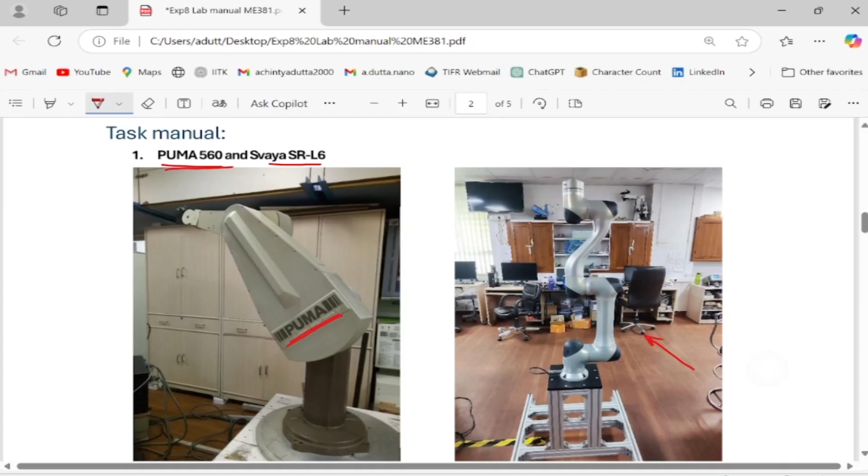Now, this is the structure of the Puma robot, which I had explained in class. So the axis system is also given there. It has 6 axes. This is the first axis. That is my Z0. That's my Z0 and Z1. This is the second axis. Okay. There's the third axis. This is the fourth axis. There's the fifth axis, and this is again the sixth axis. So Z1, Z2, Z3. This is Z4, this is Z5, and that is Z6.

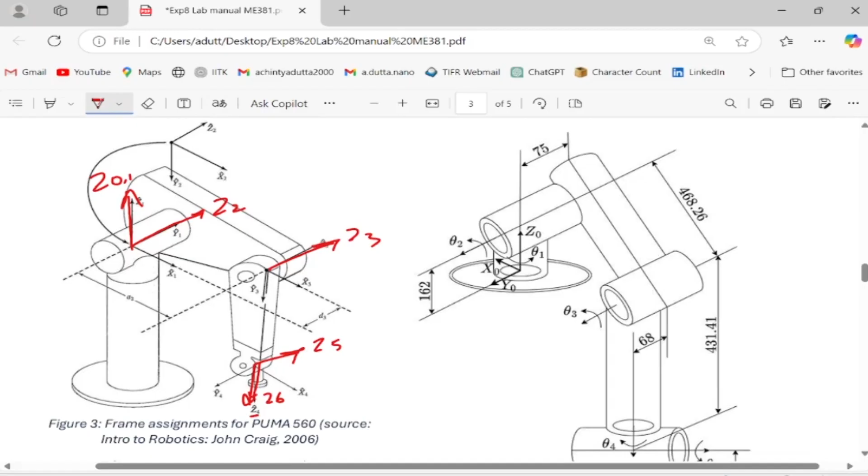Now, correspondingly, you can put the x-axis and write the DH parameter table. Okay, so you can take this as a homework and do the DH and write down the axes for this robot. And after you have made the axes for this robot, what you can do is you can fill in the DH parameter table, which is shown here.

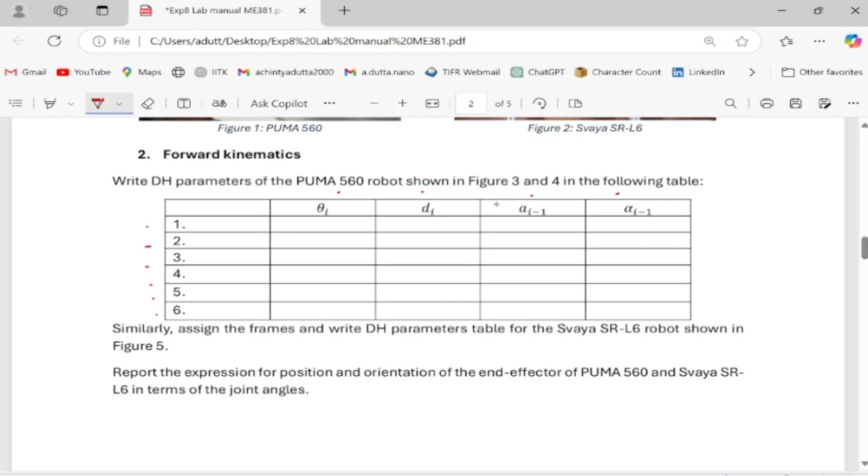So this is my DH parameter table for the Puma robot. So it is A, alpha, D, and theta, and there are 6 degrees of freedom. It has 6 joints which are given here. So this is a good exercise for you to understand how the forward kinematics of this robot is done. So this is the Puma robot. It has been taught in class also.

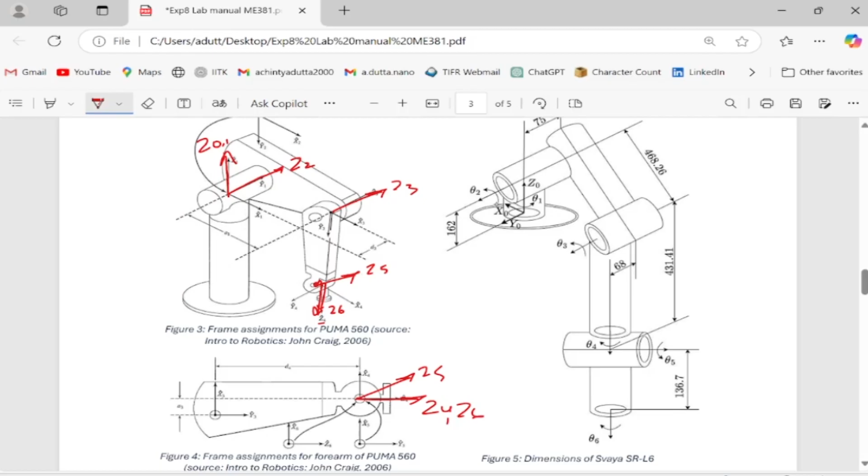Now, something to note here is that the last 3 axes intersect at the point here. So we have our z-axis here. So this is my Z4, that's my Z5, and that's my Z6. Z4, Z5, and Z6, they all intersect at that point. Now, if you look at the Svaya robot, this is the Svaya robot, the one on the right here.

Now, the structure is a little different in the sense that the first axis is here. The second axis is there. So that's my Z0, this is my Z1, this is my Z2, this is my Z3. Then that's my Z4. This is the fourth axis, the roll, which we call Z4. That's my Z5, and this is Z6 again. So structurally it is a little different.

For example, the roll in the Puma robot is at the wrist, whereas the roll in the Svaya robot is at the elbow. In terms of definitions, we say this is my waist, that's my shoulder, that's elbow, and roll, pitch, and yaw are there. So in this case, this is my base, which is my waist, this is my shoulder, this is my elbow. The roll is again at the elbow, and this is a pitch and a yaw there.

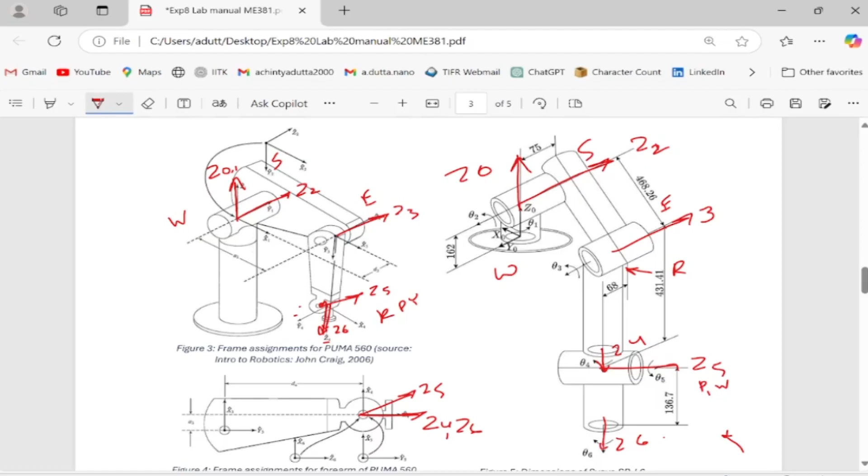So the structure is a little different, so the kinematics is a little different. It's a little tricky to do kinematics here. In fact, the last three axes are not intersecting, so you may need to do numerical computation there. So you can also write down the DH parameter table for this robot, which is a little bit more tricky, and then try and do the forward kinematics. So we'll be looking at these two robots today.

This is the Svaya collaborative robot, which means that it has safety features to interact with humans and collaborate with humans. As we go along, we'll see what are the various features of this robot. First we see that this has 6 degrees of freedom, and it can be programmed either by using the teach pendant, which is down there, or this basic PC-based mode, the computer, where also we can program it in different modes.

So first, this is the mode where we can jog the different joints. You can see that the various joints are drawn there: 1, 2, 3, 4, 5, 6 joints, and by moving the cursor you can move the corresponding joint manually. When you move, you can see on the left hand side of the screen the robot is also going to move. So there is a robot simulation here which moves.

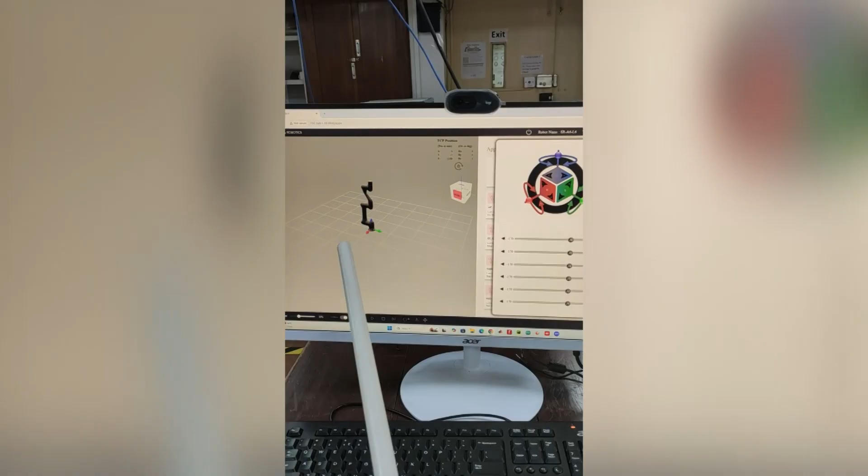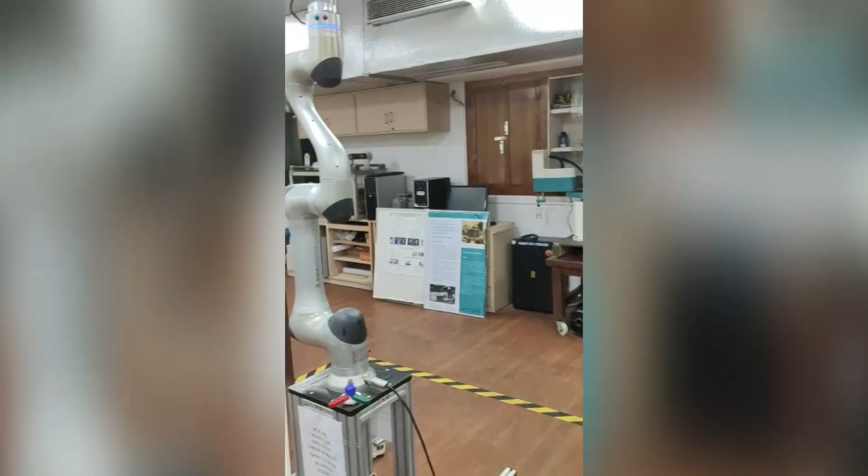This is the teach pendant, with which we can manually change the various joints, and this is the real robot here. So when we move on the computer screen, the simulation will move and the actual robot is going to move. So these are the 6 joints in the robot. The first joint is the base joint, which is a vertical joint. So let's move the first joint. You can see that the first joint is moving about the vertical axis, the first axis of the robot.

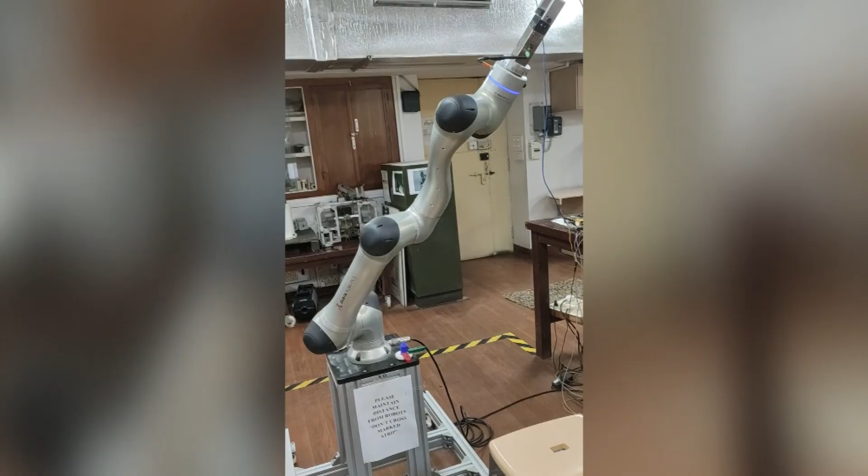Now, this is the second joint, so the arm is going to go up and down. You can see that the arm is moving, or maybe I'll see it from the side. So the arm is moving about the axis here. Oh, this is a large robot, so it goes out of frame. So this is the axis which is coming outside from there. Now it is going up again. So this is the second joint.

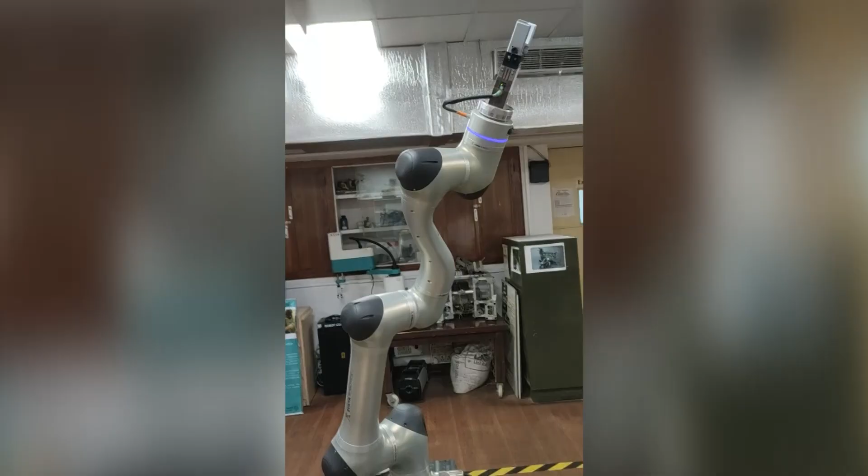So the first joint was this one, vertical. The second joint is horizontal, which is called the shoulder. The third joint is the elbow joint, which is this one. So maybe we can move the third joint, which is the elbow joint.

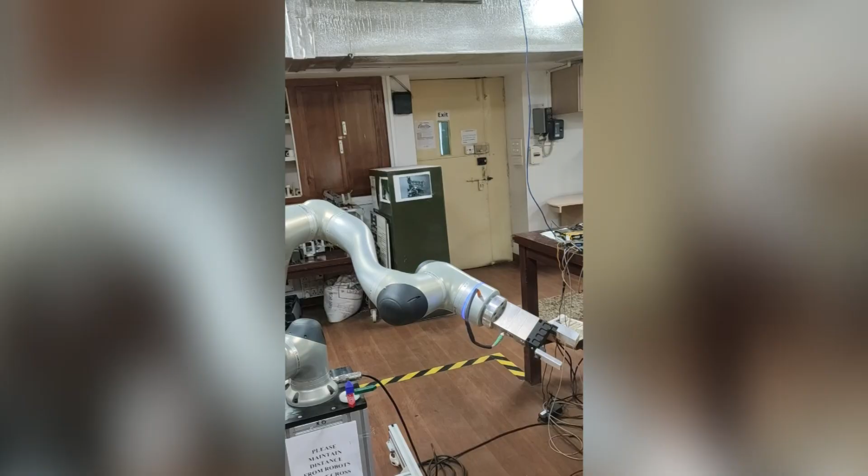And the elbow is going up now. That is the elbow joint which is moving up. Now you can see that as it is being moved, on the computer screen the simulation is also moving. So maybe I'll bring it closer. So the simulation is also moving. So between the real world and the simulated world there is a complete 1:1 correspondence, and as it is moving, the joint is moving in the simulation and also in the real robot. So this was joint number 3, that is the elbow joint.

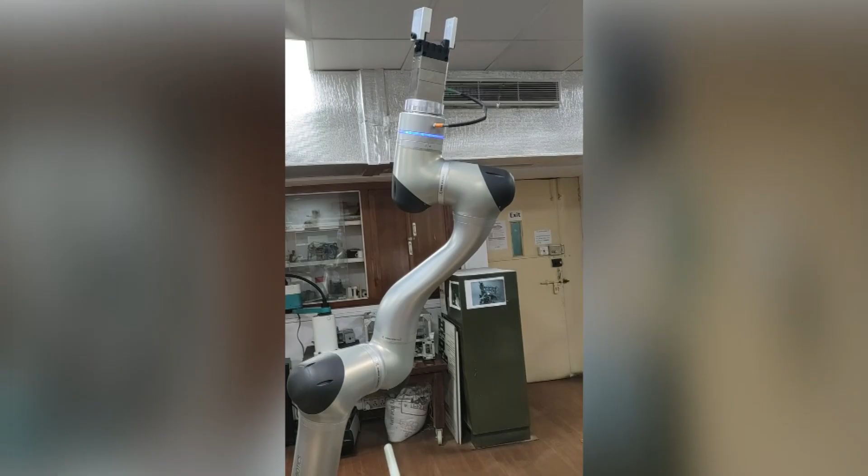Now this is joint number 4, which is called the roll axis. So the joint is a vertical axis, and this is the vertical axis about which it is rotating, in this particular configuration. So on the side, if we see, the joint is here. That's the vertical axis of the joint. So this is the roll axis.

In the case of the Puma robot or the human arm, the roll axis comes at the wrist. In the case of the human arm, it is at the elbow, but in the Puma robot, which we'll see, that comes in the wrist of the robot. Whereas in this robot, it is coming at the elbow, which is very similar to the human arm. So again, joint number 1, joint number 2, joint number 3. This is joint number 4.

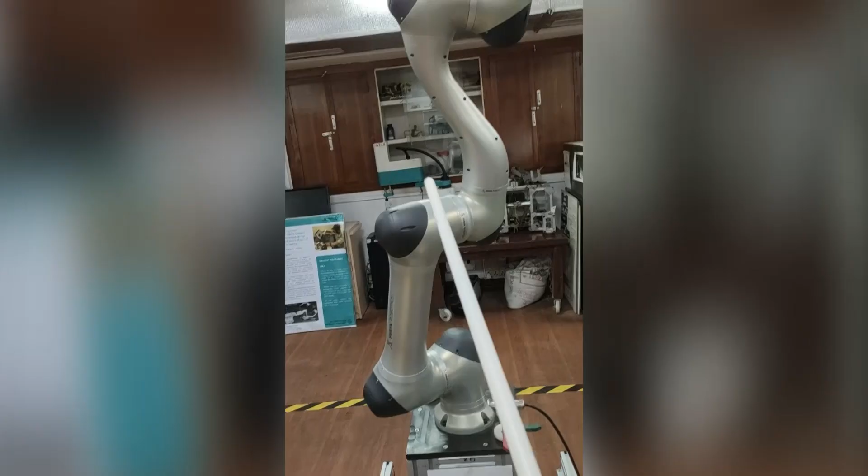Now joint number 5 is this one. That is joint number 5, which is a horizontal joint. So when it is moving, you can see that not the arm, the wrist is coming down. Okay, the wrist is coming down. So this is my axis, the 5th axis. So this is the 5th axis which is moving. That is this one.

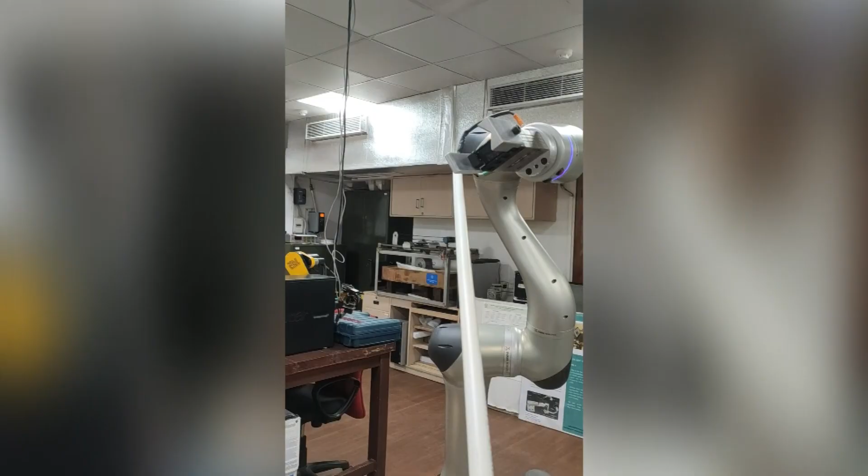Now, the sixth axis is the roll, which is this one. This is my axis, which is vertically out, coming out from the gripper. So it's vertical. This is my vertical axis, which is rotating now. Maybe you can see it closer. So that is a rotation about the vertical axis. Sorry, not the vertical axis, the sixth axis, I mean. Yeah, this axis is the sixth axis. So that is the sixth axis.

Okay, so that gives us the six axes: axis number 1, axis number 2, axis number 3, axis number 4, axis number 5, and axis number 6, which is here at the back. Now you can see that the structure of the robot is a little different from that of the Puma robot, in the sense that it has a very curvilinear structure. So it is curved and the roll axis is coming here. So if you look at the joints, they are curved.

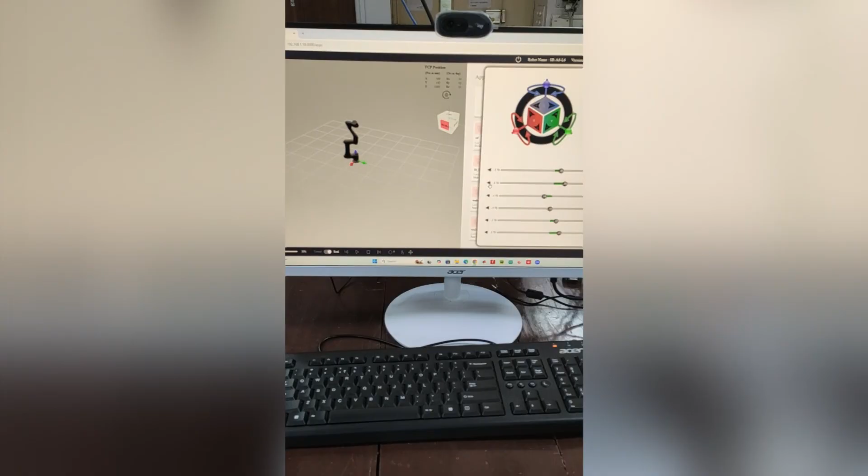So we have seen the basics of how to move the various joints using the teach pendant, and the simulation of the robot correspondingly has a 1:1 match with the actual robot. So we have 6 axes plus the gripper, so we can turn the gripper on and off. So this is the end effector, in this case a gripper. This is not pneumatic. This is an electrical gripper, and the gripper can go on and off.

So the gripper is in open condition now, and now it is in closed condition. It doesn't close more than that. It's not required. So that's the open and close motion of the gripper. So we explained the 6 degrees of freedom of the robot and the open and close of the gripper.

Now let us look at writing a very simple program. For example, if I want to move the robot to some position. The robot has come back to its original home position now. Now suppose I want to write a very simple program to move the robot to some point in space. Say for example, to this point in space I want to bring the robot. So manually, we can bring the robot to this point, and from here maybe I want the robot to go here.

So I'm going to store these 2 points in the robot space, and then the robot will move between these 2 points. So to do that, we write a program. As it is shown, it is a very, very easy way of writing. This is basically a GUI given by the robot manufacturer.

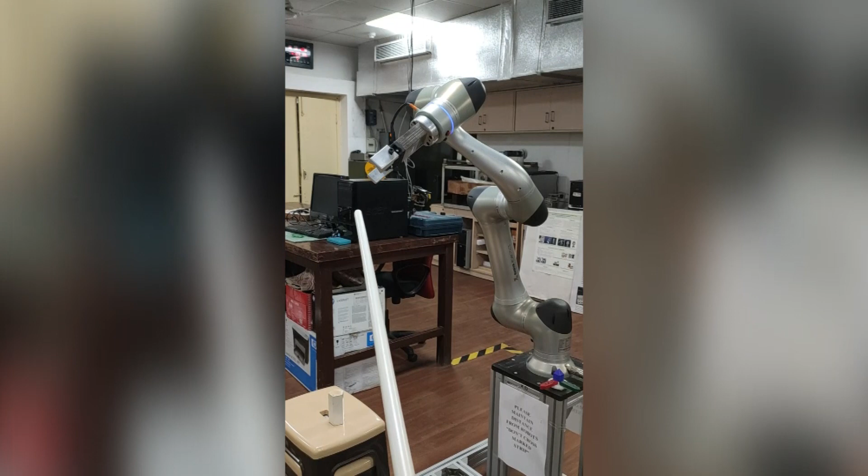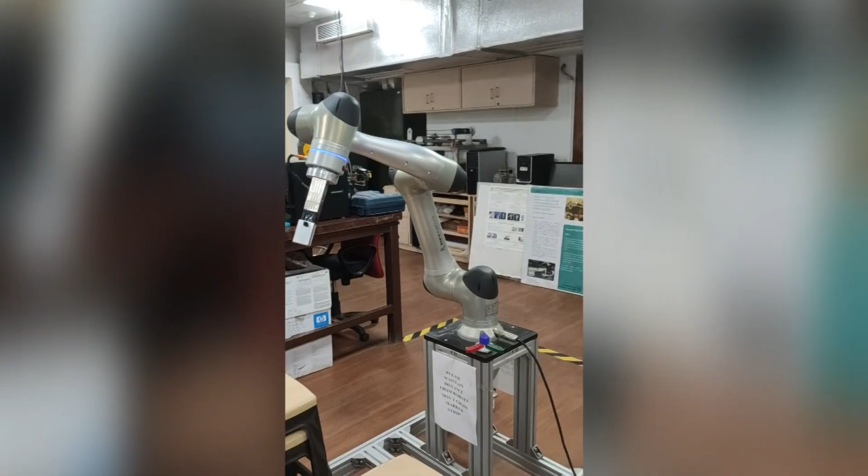okay, maybe this point is 1 point. So what we have seen is we are teaching it manually to come to this point. So this is the point where we have just brought it manually now. This is completely manually being brought here. So this is 1 point, and I say that in the program, this is point number 1, where it has been taught. Okay, that's the point number 1.

Next, what we can do is we can choose the move command. So we are going to move it to another position. For the second position, again we use the manual mode by changing the various joints. I'm moving the robot, so the robot is moving to some other point now. This is completely manual.

And now what we can do is we can play this program. It is going to play the program between these 2 points. So we move the robot between these 2 points. So these are the 2 points which we taught manually, very simply by choosing these 2 points and then writing the program.

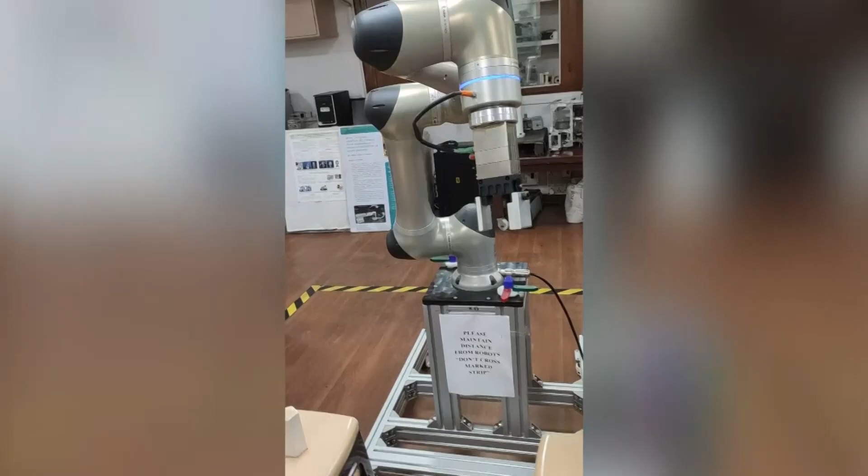Now this is a GUI, so it's very easy. You just pick up the position commands, put them in there, and manually teach it. Unlike in VAL language, where we have to actually write the program ourselves and teach the points, here it is much easier. So we taught it the 2 points, and the robot is moving in between the 2 points now. This is the simplest way of teaching a program, by manually teaching the points and then moving from one point to another and repeating it. This is probably the simplest way you can get in robot programming.

Now what we can do is add other features. For example, we want the robot to go and wait at some point. So we have added a wait function there. You can see the wait for time 1 second. 1 second is very quick, so maybe 10 seconds, or maybe 5 seconds. So we have added one more block which says wait at position number 2 for 5 seconds. So now when we run the program, it moves from point 1 to point 2 and waits there.

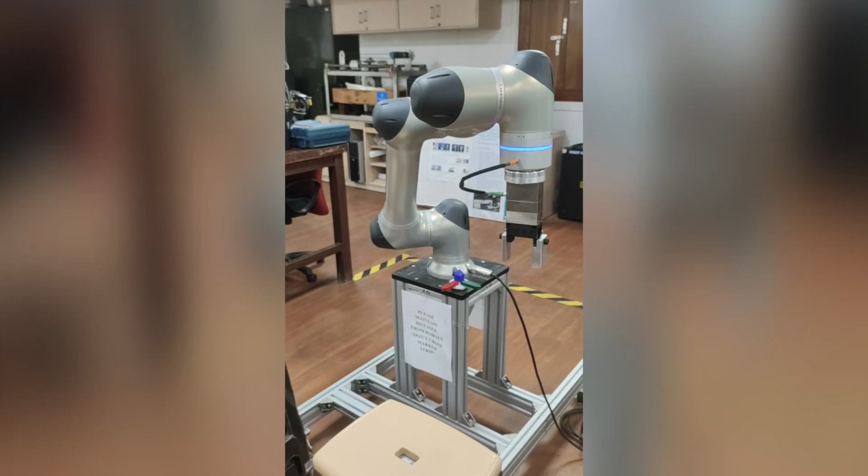So it's waiting at each of the points for 5 seconds. This is similar to the delay that we put in the VAL program. So this is the simplest way of writing a program, where you can choose various blocks and arrange them in a serial way, the way you want the robot to move, and the robot will execute the same motion.

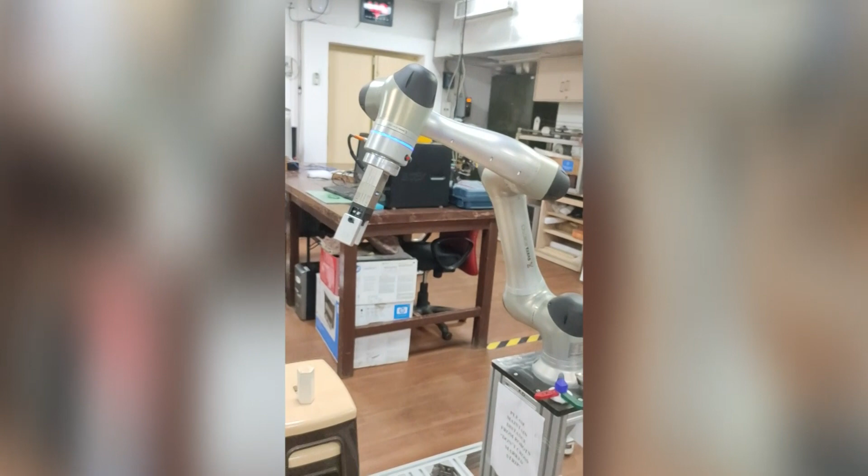Next, suppose we want to pick up an object. You can see there are 2 stools in front. There is one table or stool kept here, and another one kept on this side, and there is an object kept on it, a rectangular block. Well, it's not rectangular, it has 5 sides, so it's a pentagonal block which has been kept there.

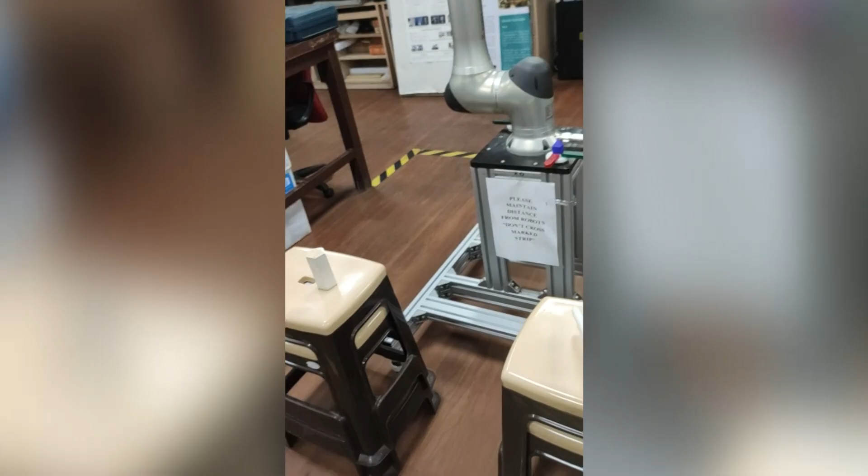So from the start point of the robot, we can manually take the robot to this point and teach it the position and orientation of this part which is kept there, then close the gripper, pick it up, and maybe go and put it here. Again, we teach it the position and orientation of the point where we are supposed to keep it, and then we can keep it at that point.

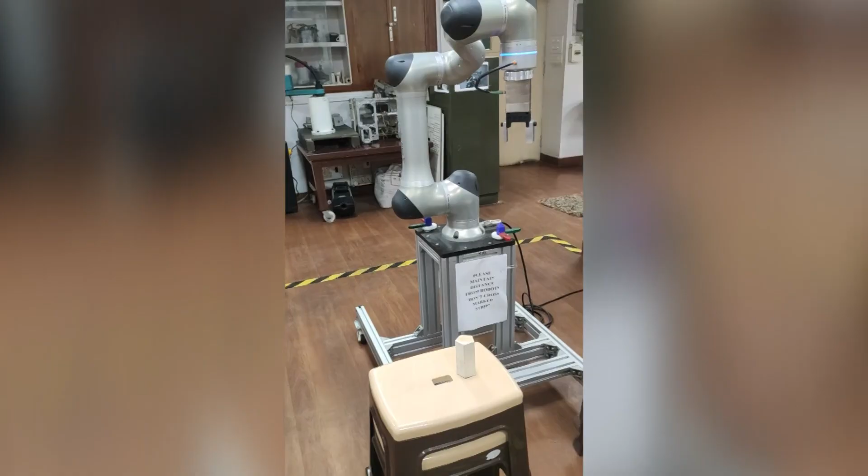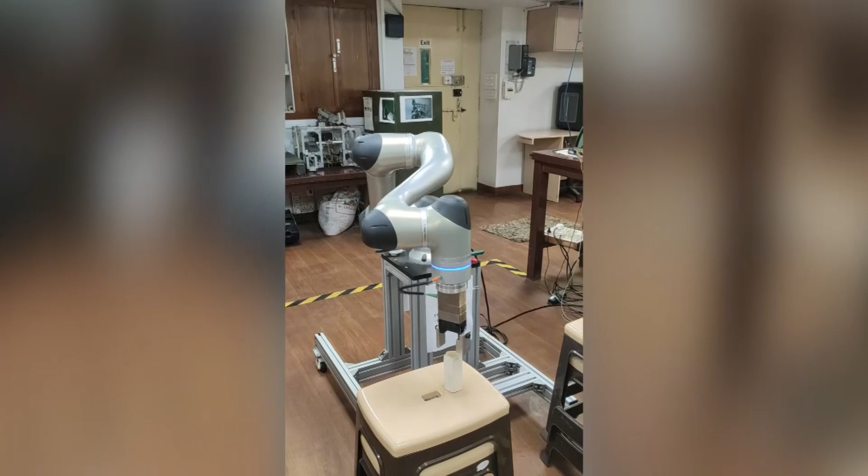Okay, so what you found is that it picked up the part. So the program has been written simply by teaching it the various points. Now let's play the program again and have a look. Okay, so maybe you can play back the program again, put the part in here. Okay, so this is a very simple way of programming a robot.

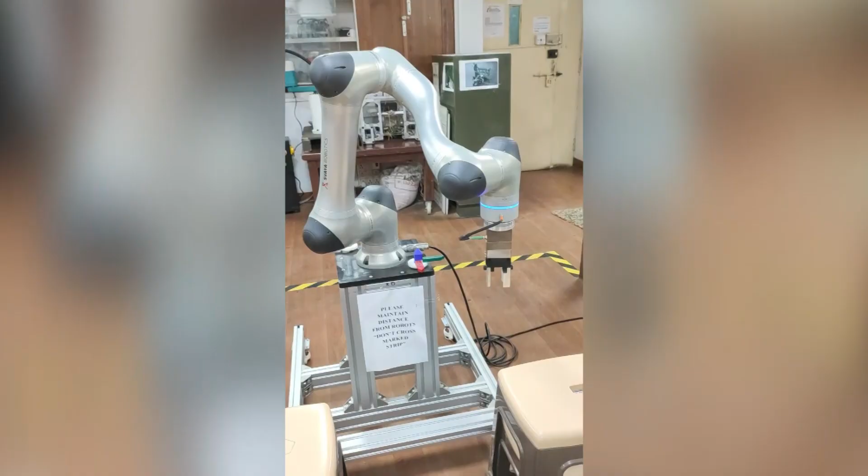Okay. Okay, you can run some of the program. This is another program which has been written earlier to move from some position to some other position. So you can see it in different directions.

This is showing the covering of the whole work volume, or the full work volume of the robot. So it has a pretty large work volume, almost 1.5 meters.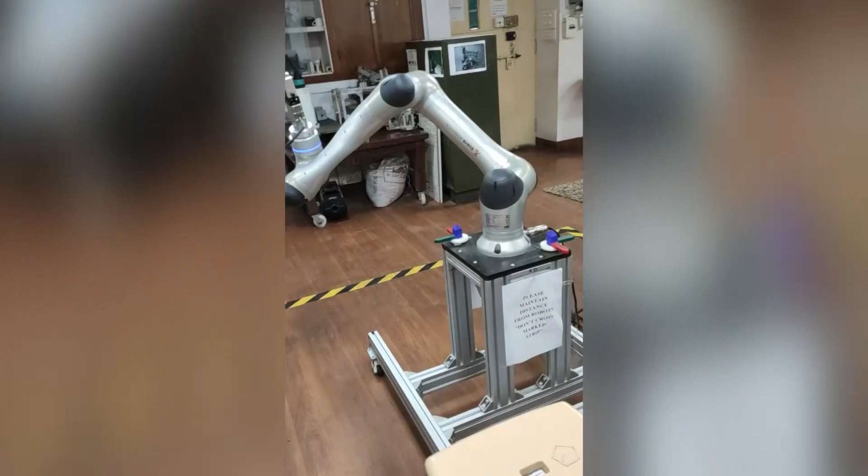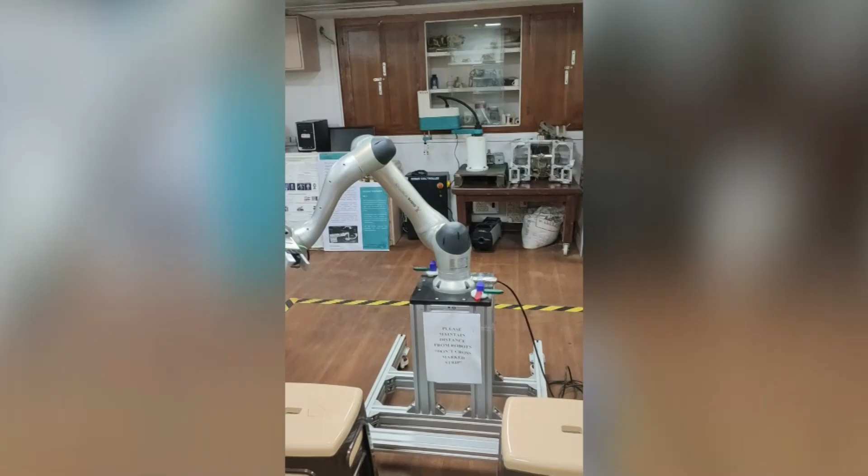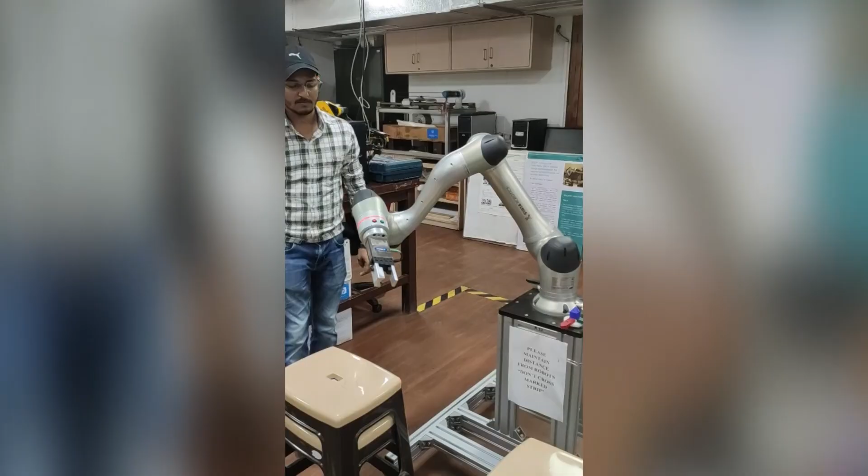Okay. Safety mode is on. So that is something to show about the safety mode, that if it goes and hits something, it immediately stops. Okay. So that is one of the reasons why it's called a collaborative robot, in the sense that it can collaborate with a human. So in terms of safety, it can sense the force being applied.

How does it sense the force being applied? It basically measures the motor currents. So if it hits something, immediately the motor current goes up, and it understands that an extra force has been applied, and based on that, it will immediately stop. Okay. So the next part that we have is, this is a collaborative robot. So we are able to program it even by catching and moving it.

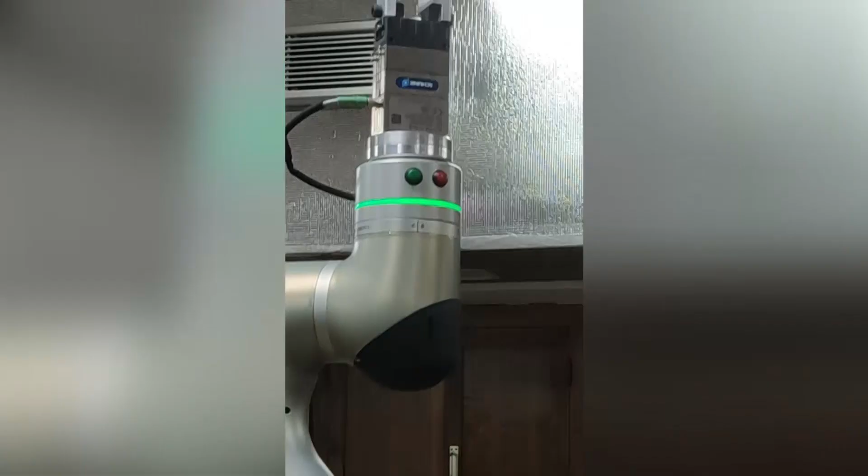So you can actually catch the... So there is a mode. So we just change the mode of the robot. And by changing the mode of the robot, basically, we can see that these are different modes of the robot. So we're going to change the mode of the robot, and then we can simply move it by hand. So you can see that he is just simply catching the robot and moving it.

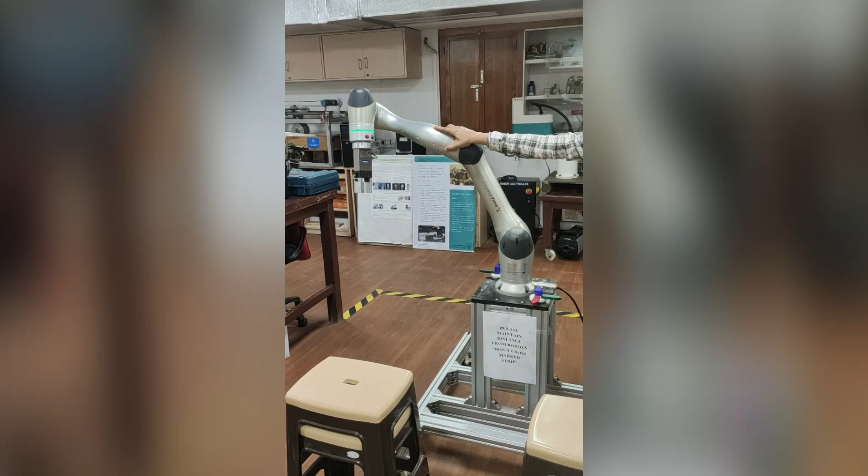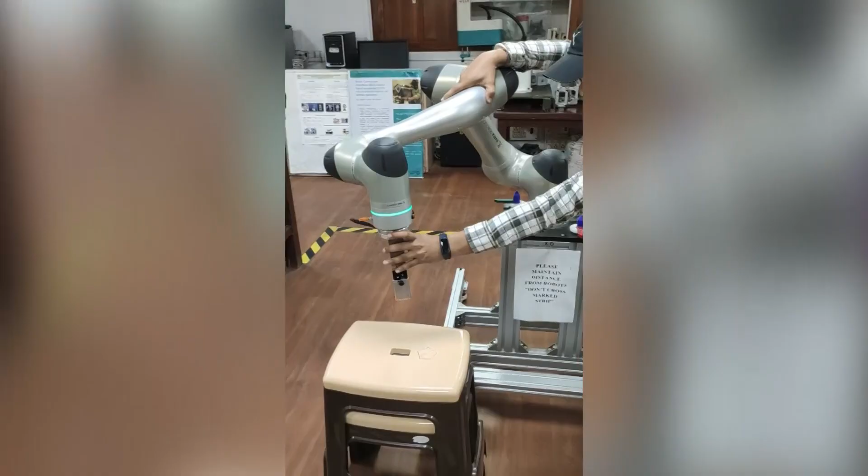Now this cannot be done for an industrial robot. Okay, this can only be done for collaborative robots. So he can actually hold the robot and take it wherever you want to take it. For example, in the previous case, we had the case where we wanted to pick up an object. So we can put the object and take it wherever we want to take it, and record the particular position. Then we can open and close the gripper.

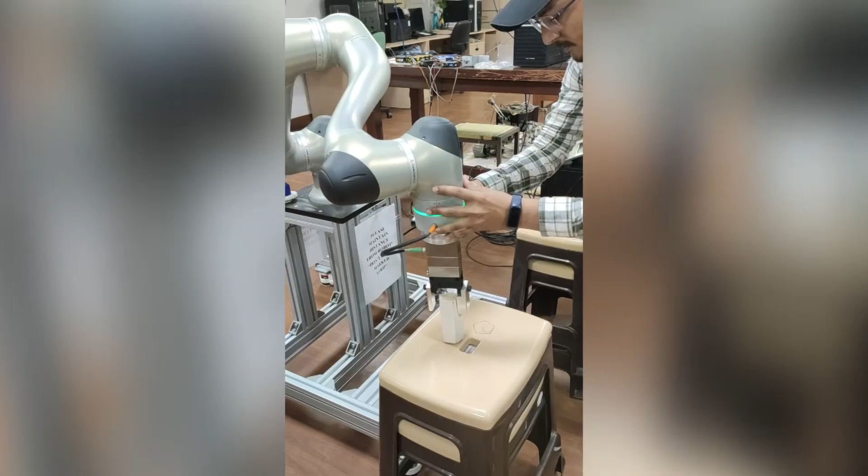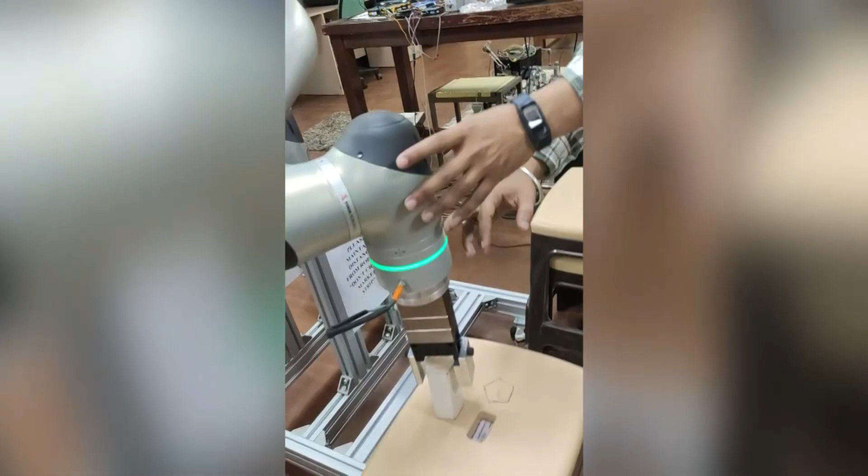Okay, so this is a position where we can simply take the robot, program it. Okay, so he's straightening it. Okay, so suppose we have straightened it there, and we are saying that no, it is still not straight. No, keep it straight. Okay.

So that is the point that is being taught, right? So that point is being taught. Okay, so it has actually learned this point. Okay, so that is the point that it has learned, just exactly the same way we were programming it. So this is the point where it has learned this point.

So it says position, save location. It has joint 1, joint 2, joint 3. What are the corresponding angles? And you can see in the simulation also where the location of the robot is. And if you look at the robot, actually it is there. So this is something like a digital twin also, where whatever the robot is doing is getting simulated there.

Now we can look closely at the hand. So that is where the hand of the robot is. Okay. Okay, so now we can take it up and take it to some other position. Now this is basically the reason why it's called a collaborative robot. So it's collaborating with the person in doing the particular task.

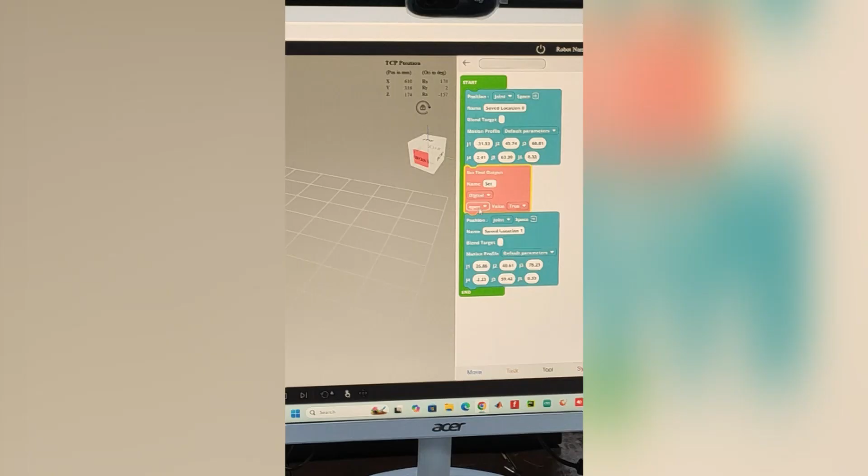So it has to pick up from there and keep it here. Okay. So that position has again been taught. So that's position 2, which has been taught there. Okay, so the various joint angles from joint 1 to joint 6 are noted there. Okay.

So we can also program for the gripper opening and the gripper closing. Now this is the primary reason why this robot is called a collaborative robot, because unlike an industrial robot, it can collaborate with humans in the sense that if it hits somebody, it is safe, and it can sense the force and stop. And the other is that you can program it the way it was shown very simply, by simply catching it and moving it around.

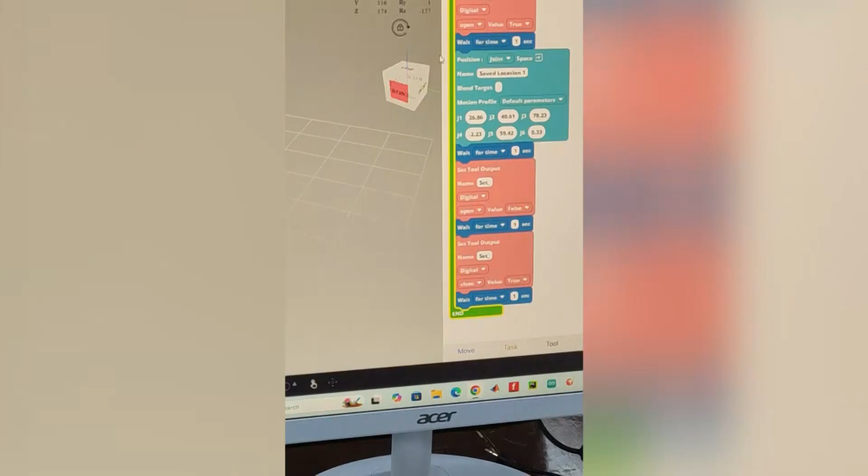And writing the program is also pretty easy in the sense that you just have to pick up the various points and it can generate the program by itself. Okay, so we don't have to write the full VAL language code like we'll have to do for the Puma robot. So that's the code that is there. Okay.

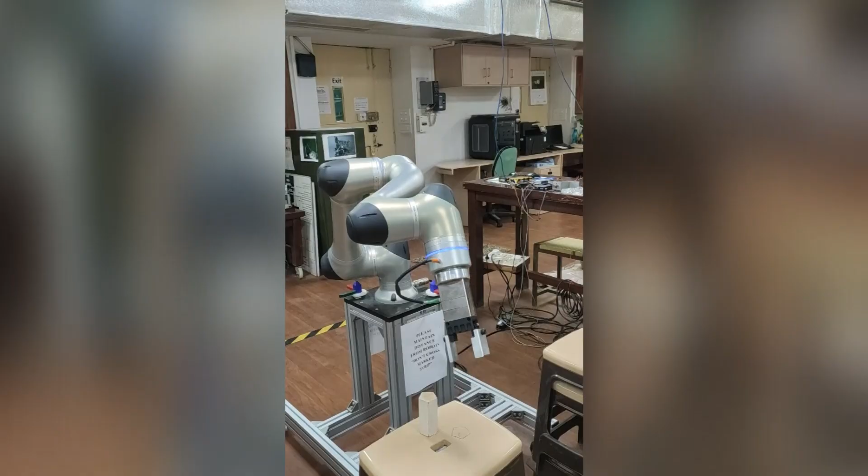So it has gone to the start position. Now when we execute the program, it is supposed to go to these 2 positions. Oh, the positioning accuracy was not correct. Okay, it did not go from the top position. Maybe we should teach it the top position first and then go down.

So when picking up an object, you have to go from top. So we have to teach it such that it goes on top first, okay, and then goes down straight. Otherwise this problem will come. This is something I had explained, that when you pick up an object, you have to go from the top down, and when you are coming up also, you should come up straight. Otherwise this problem can come up.

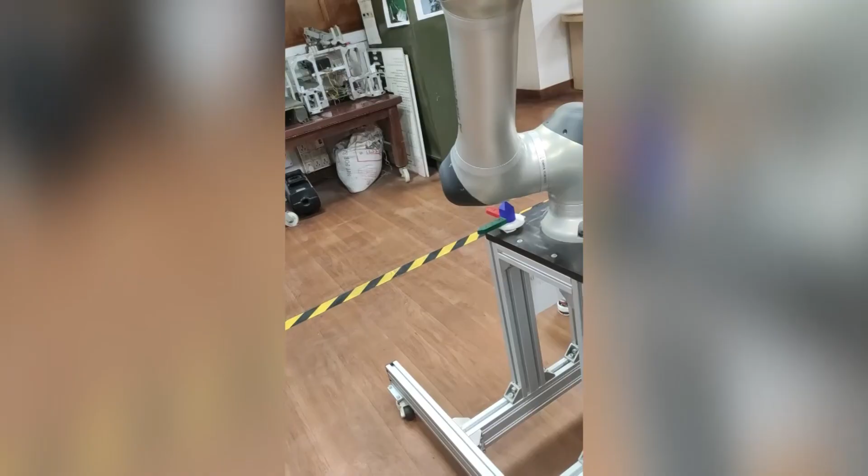This position is moved also, no? Yes, sir. So take it down again and catch it. So it's 3-4 points, right, depending on. Okay. So this is one point. Yes, sir. The second point is catch this one, or take it down. Take it down. It has to go down straight. Yeah. Okay. That's the second point.

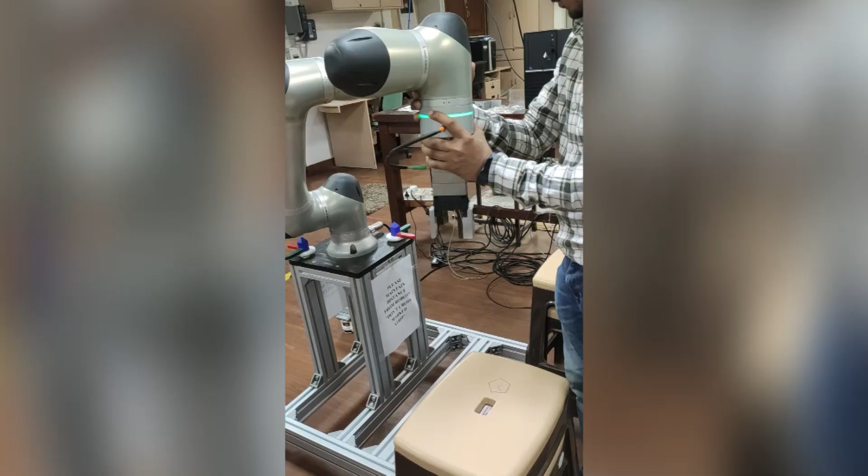So this is on top of the object, huh? Yes. Okay, then from here it has to go down straight. Yes. No, it has to go down exactly straight. If you take an angle, it will hit again.

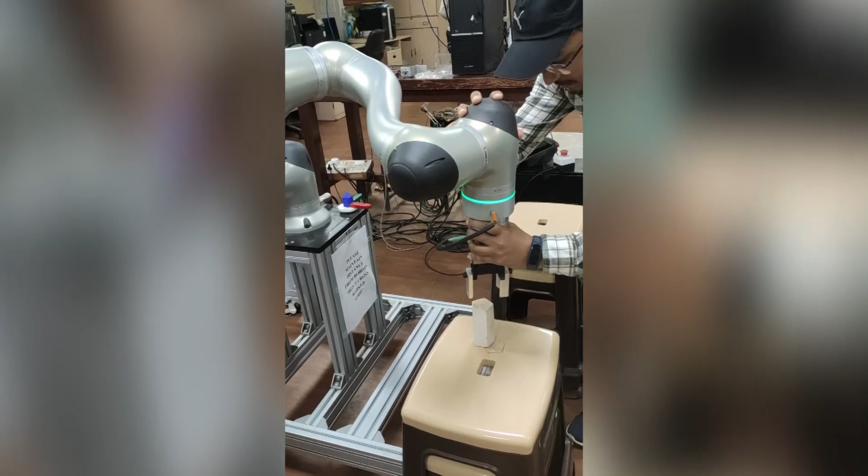So that's the second position where it's supposed to go and catch the object, and then it has to go up straight. Next, after catching it, it should go up straight. No, it should go up here only, straight here.

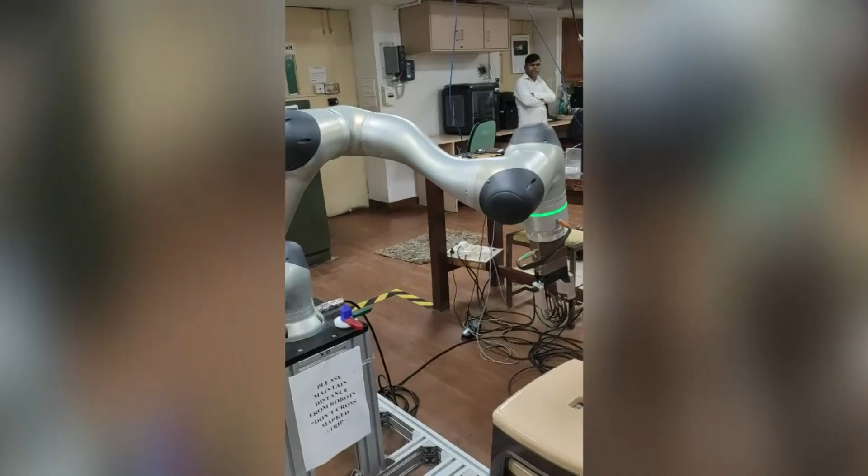And while dropping also, it should go on top and then go down straight. Okay, so we are recording the position where it is supposed to not drop, but keep it, just on top of the point. And then we have to bring it down and keep it.

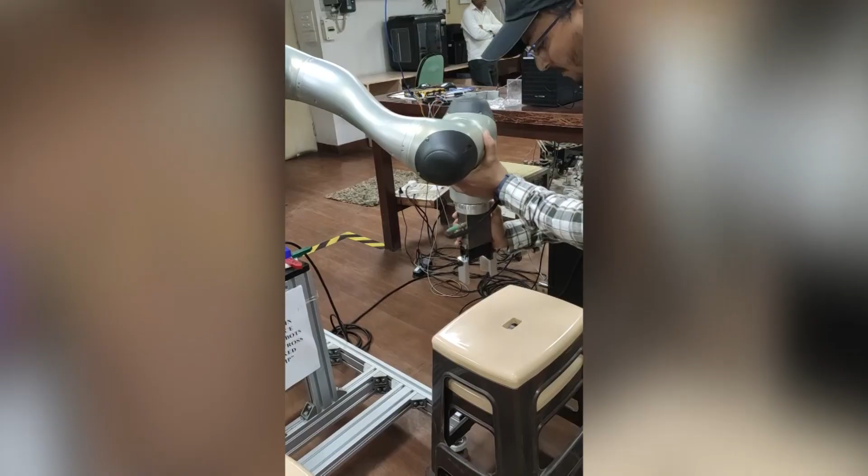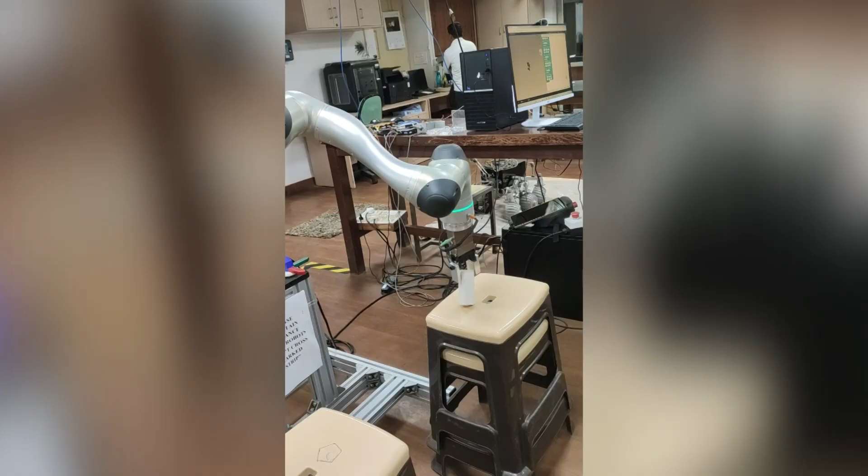So what you can see is that even very small errors are there, because the joints are unlocked now. In some of the experiments we had done, the joints were also unlocked, which means that it is free because it's in gravity mode. So the gravity pulls it down, so fine positioning is difficult, because the joints are completely free. So if you just leave it, the joints will start moving because of gravity. Okay.

So the program is being written in which we have one point, then we go and catch it, then we take it up. So you can see that it's easy, you just move the various blocks around, and then the program is automatically generated for it. Okay. So this is much easier than writing the VAL language program in the Puma robot, which you'll be seeing shortly.

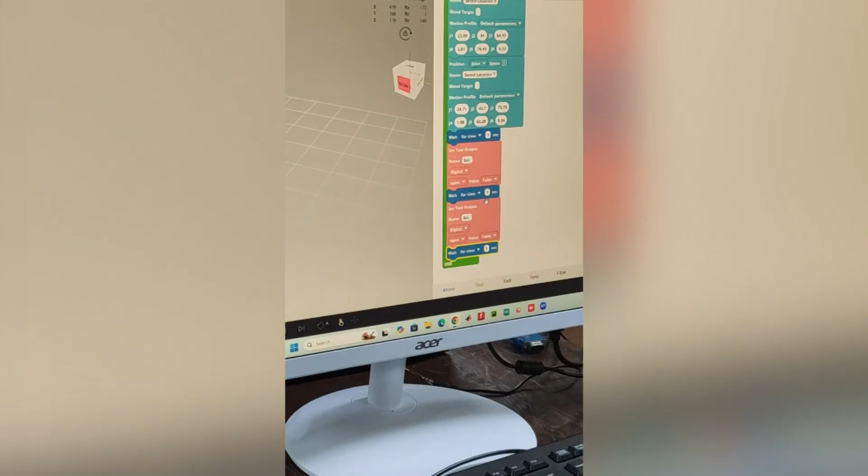So you can play it once and see. Okay, so it was able to pick up from here and keep it there. Okay.

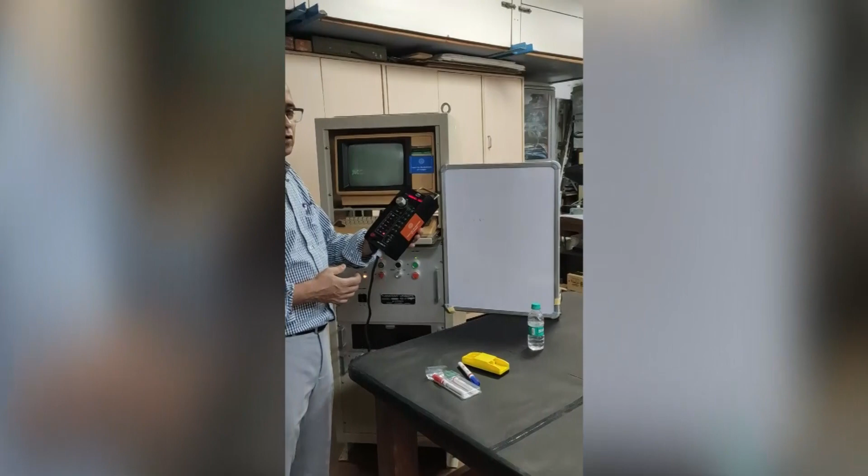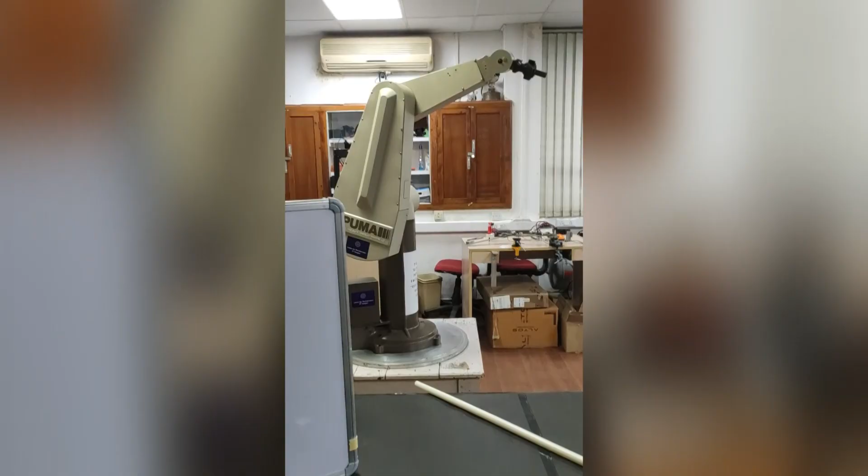Puma robot. So this is the 6-axis Puma robot, and this is the teach pendant. You can see that this is a pretty old teach pendant. So this is the Puma robot, and this is the teach pendant of the Puma robot, in which we have 6 axes. So these are the 6 axes which are marked here: 1, 2, 3, 4, 5, 6.

And these are the various modes. We say this is the joint mode, where you can operate in the joint mode. So if I press this, it goes into joint mode. Then there is world mode, tool mode, then computer mode.

And for example, if I press this, it goes into the computer mode. So I can move each of the joints by toggling these toggle keys. So if I press one of the keys on this side, the robot moves. Okay. So the robot Puma is 6 degrees of freedom. The first degree of freedom is called the waist axis.

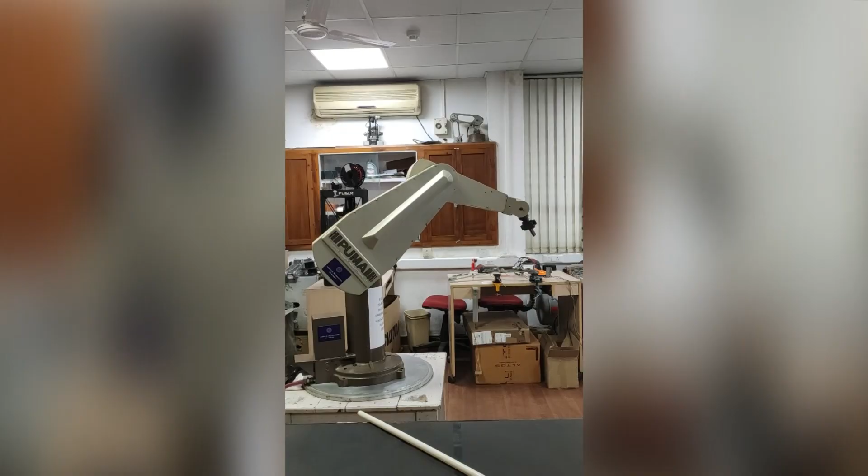It is similar to our waist. Now that degree of freedom is a vertical degree of freedom. Okay, so it's a vertical axis, and that is called the waist axis. So this is my waist axis. The second axis is the shoulder axis, that is the shoulder up and the shoulder down. This is very similar to the human shoulder axis. So shoulder up and shoulder down.

Then the third axis is the elbow axis. So this is my elbow up and elbow down. Okay, so this is the elbow up and elbow down configuration. And so we have the waist, the shoulder, the elbow, and then we have the wrist axis, which is my roll axis, which is my wrist roll. Now that is at the wrist, you can see. This is the pitch axis of the gripper, and this is the yaw axis of the gripper.

Okay, so the roll, pitch, and the yaw are at the same point. And this is something we have studied in kinematics, that if these 3 axes are not at the same point, then you cannot have the inverse kinematic solution. Okay. So unlike the other Scara robot which we saw, what we see here is that structurally it is different, in the sense that the waist axis, the shoulder axis and the elbow axis are distinct. Okay, they are not curved; they are on a plane, and the roll, pitch, and the yaw axis are at a point. Okay, they are all at the wrist. Okay, so this is the 6 degree of freedom Puma robot, one of the earliest robots that was made.

Now suppose we want to write a VAL program. So I'll draw a VAL program here. Suppose we have an object kept on the table, and I want to pick up the object. So this is my object which I've kept there. And I want to pick up this object. So this object has some coordinate. Let's call this point P3.

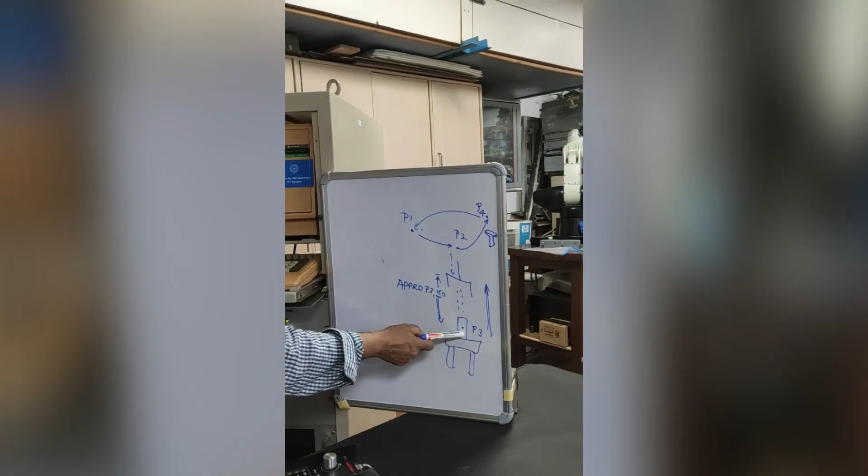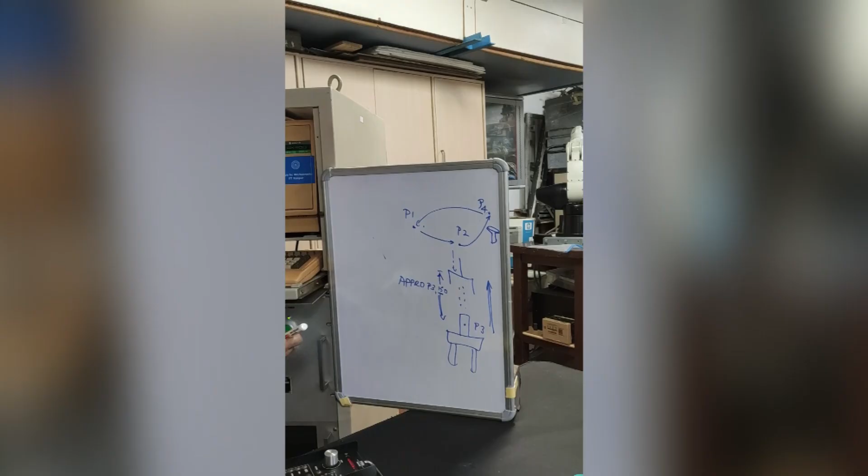So first what we want to do is we want the robot to go to the point P1, then go to the point P2, then approach the point P3 and keep a distance of 50, meaning it will go and stand on top of the point P3, and then it will open the gripper, go down, catch it, then go up, which is called depart, it will go up straight again to this point, and then from here it will go to P4, open the gripper, drop it there, and then go to the point P1. So that's the cycle. So we'll write a program in VAL language.

Let me call the program demo. Okay. Let me call it demo 1, and we'll write in VAL 2. That's the language I will use. Now in the other robot, the Scara robot, the programming is easy in the sense that we take blocks and we just arrange them, and automatically the program is generated.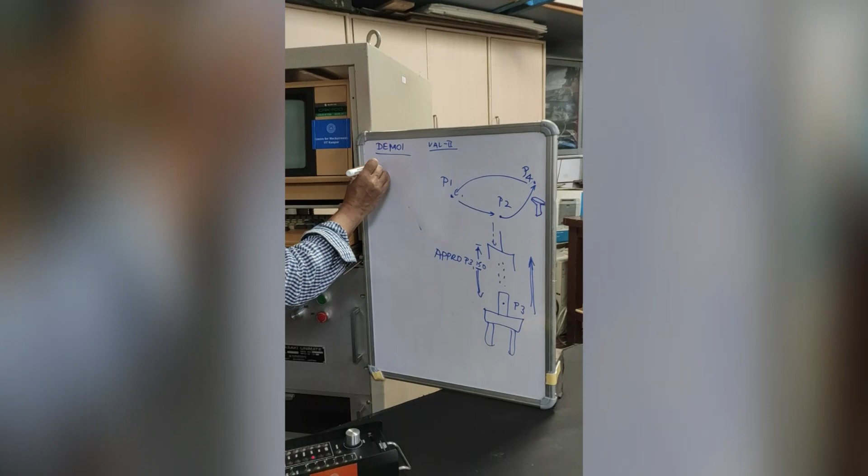But here, as I explained in class earlier, we're using VAL 2, which means that we have to write the program ourselves. Okay. So let me write the program. So first is the program name, then there is a line number, so let me say line number 1, 2, 3, 4. Okay. So the first one is move to the point P1. Then number 2 is move to the point P2.

Okay. So I'm following exactly what I've drawn here. Number 3 is approach the point P3 and keep a distance of 150. Then it is open I, that means open immediately, which is a closed loop command. Then number 5 is moves. And notice that it's an S command, which means that it should move straight, moves to the point P3,

and then we say it should close I, close the gripper, close immediate. Then 7 is depart. So depart 150 means it will go up by 150 again. Then number 8 is move to the point P4. Then I can say it is open I.

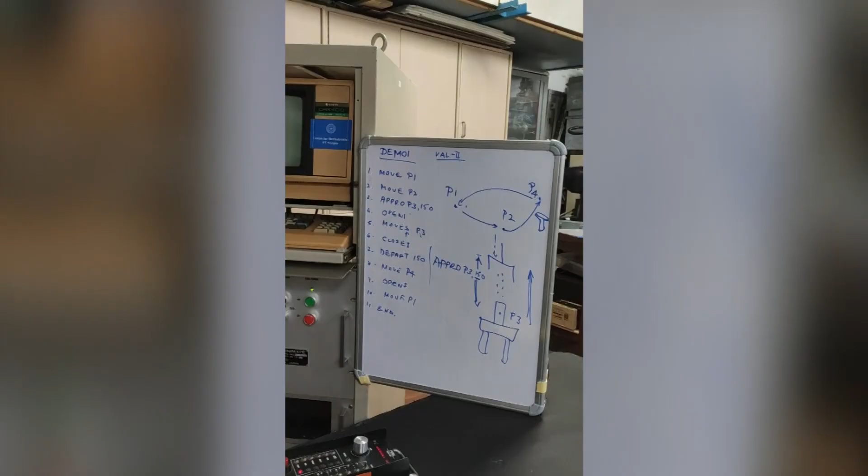That means drop the part there, and number 10 is move to the point P1, back to the point P1 again, and then number 11 is I can end the program. Okay, so this is the program that we have written in VAL language to follow this cycle of operation. So what I will do is I will type the same in the monitor, so we can see that I'll be just typing exactly the same thing.

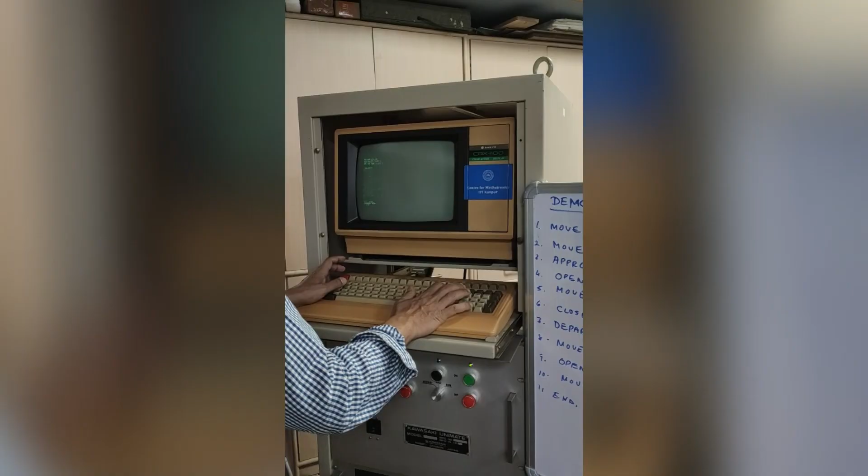So I first say edit demo 1, which is the program name. Okay, so we can see very clearly that it is saying edit demo 1 is the program name, and the program is demo 1. It starts with line number 1. So first I just type in move to the point P1. Okay, then move P2, then it is approach the point P3 and keep a distance of 150.

Okay, then we say open I, then we say moves to the point P3. Okay, then we say close I, closes the gripper, then depart by a distance of 150, and then it moves to the point P4, then open I, and then move back to the point P1. That's the cycle, and then I end it by saying end, and that ends the program.

Okay, so we have typed in exactly what I wrote here. So it is move P1, move P2, approach P3, then open I, then moves P3, then you close I, then you depart 150, move P4, open I, and then move P1 back again, and we end the program. So I have to change the speed. So let us operate at a slow speed of 20%.

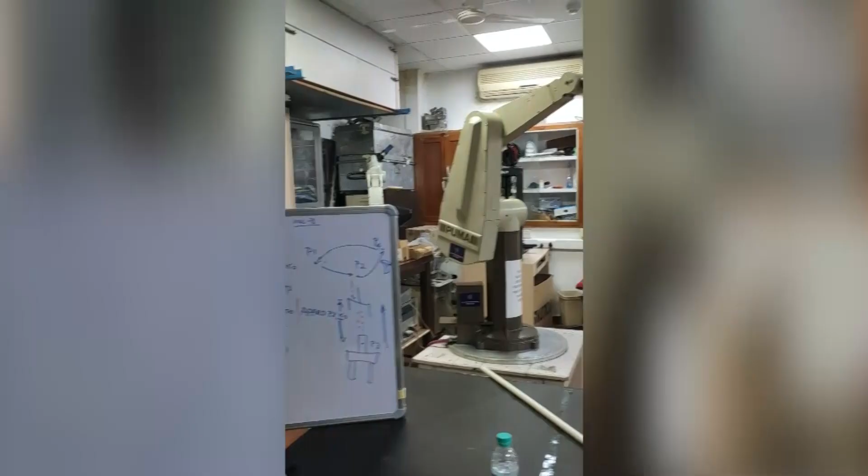So I can use the teach pendant and take it to different positions. So I'll use the teach pendant and move the robot to different positions to teach the points P1, P2, P3. I'm teaching it. Okay, so let's say this is my point P1. Suppose this is my point P1. So what I do is I say here P1 in the code.

The moment I say here P1, it gives me the coordinates. You can see the coordinates x, y, z, and alpha, beta, gamma, the roll, pitch, yaw at the wrist. Okay. You can see that the x coordinate is 513.63. So it is very difficult to get coordinates in space, and that's why the teach pendant is given.

Now if I'm not happy, then I change it again. If I'm happy with these coordinates, then I simply say enter, and now it understands that this is the point P1. Okay, that's how we teach in this case. Then I take it to another point.

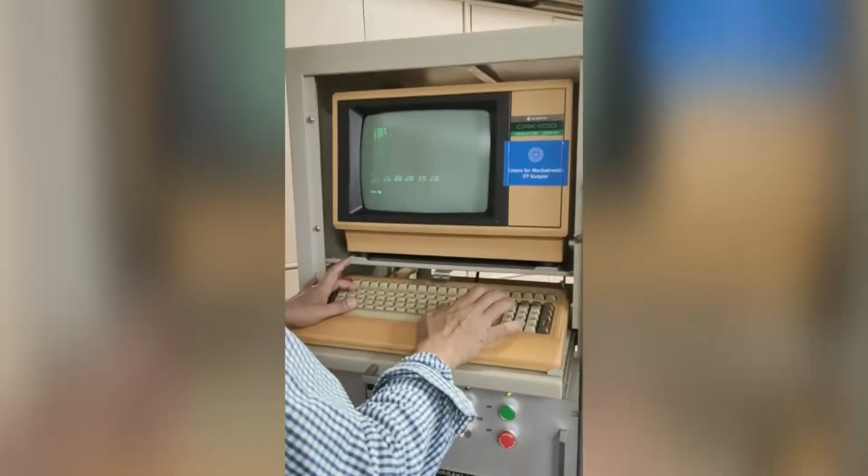No, so I bring it to the point P2. So let me bring it to the point P2. Okay, let me say that's my point P2, and so I'll say here P2, and it gives me the coordinates. So I've taught P1, P2. Now I have to teach it P3.

Now suppose P3 is somewhere below. Okay, it's more down there. Let's say P3 is down there. So I'll teach it the point P3. I will say here P3, and automatically it understands that's my point P3. Okay. Now I have to teach it one more point, that is P4.

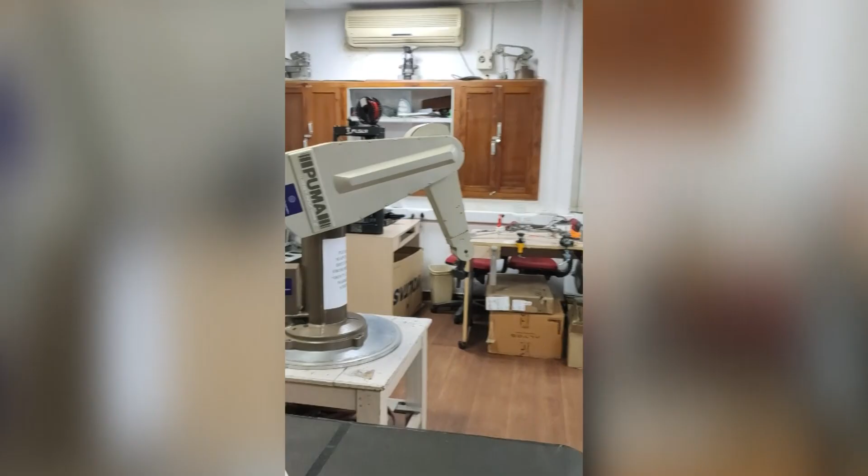So I take it, I use the teach pendant again and take it on that side. Okay, suppose that's my point P4 now. So again, I simply say here P4, and it learns that point P4. Now I change the speed. So I've taught it the points P1, P2, P3, P4. Okay, manually I've taught it.

Then I can change the speed to maybe 20%, which is slow speed. Okay, and now I can execute the program. I can say execute the program demo 1, and if I press enter, then it will start executing the program. So it will come to exactly point P1 that I taught it. Then it will go to point P2.

Then it will approach. That means it will come on top of the point and wait. Then it will go down in a straight line and go back in a straight line again. Then it goes to the point P4, drops it there, and comes to the point P1. So the gripper is not active here because it's a pneumatic gripper and we require a compressor, which makes a lot of noise. So essentially, I'll execute it again, you can see it.

So I'm executing again. Something to note is the motion. So correspondingly, if you see the program and what it is doing, there is a 1:1 match with the program and what it is doing. So I'll run it again and then try and explain. So this is my point P1. First it will go to the point P1, then it will go to the point P2.

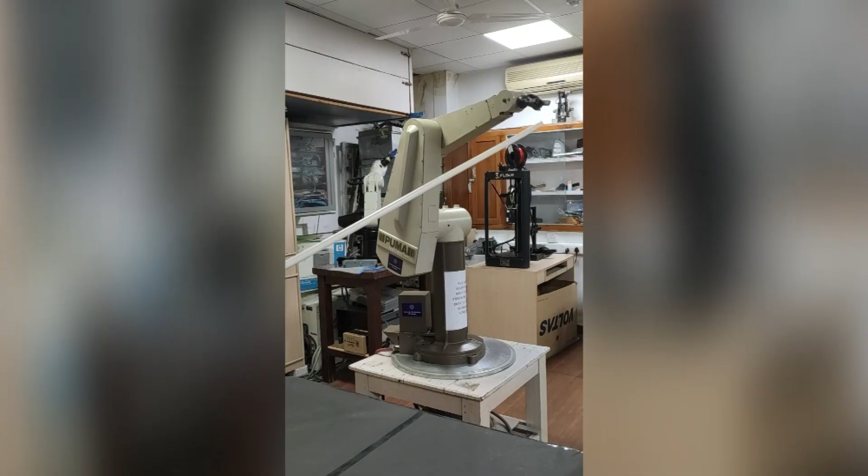Then my point P3 was somewhere down there. So it will approach the point like this on top and then go down straight. This is my moves command, and after catching it goes back straight. So this up and down motion is always in a straight line, for safety. So you would have also noticed that the moves command is slow. Now let me increase the speed to 100%.

Okay, and then execute the program again. Demo 1. So this is much faster. So if I want to execute it more than once, I'll say 5 times. Okay, it'll execute it 5 times. So if you see, this motion is slow. So this is a move command, that is approach. This is the straightness, up, down, and then there.

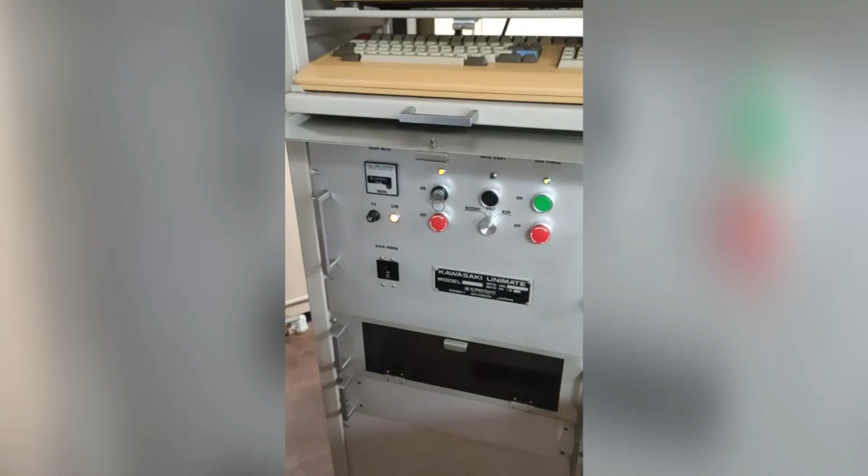So it has executed the program 5 times, and it is saying stopped at demo 1 after executing 5 times. So there is a counter in the program which executes that many times, and then automatically it stops. Now the other features are the emergency stops. All machines have emergency stops. For example, this one and this one are emergency stops. Here also on the teach pendant we have an emergency stop. When we operate the emergency stop, immediately the program will stop.

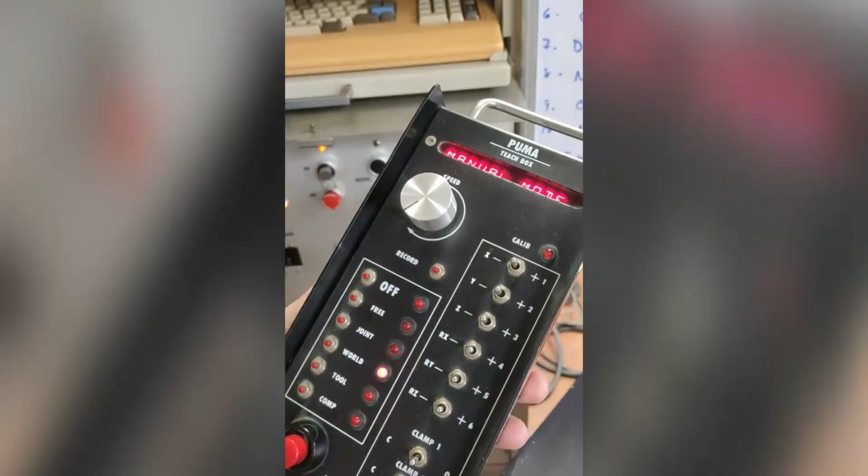So there are different modes by which you can operate. For example, this is the joint mode. If I press the joint mode, I can move joint by joint, so one joint moves at a time. Now there is the world mode, and there is the tool mode. If I'm on world mode, then all joints will move at the same time. You can see that multiple joints are moving simultaneously. That is in world mode now.

So depending on which mode you are operating on, there is a tool mode also, in which case I'm moving the tool mainly. So this is the world mode. And this is my tool mode. So these are different ways by which you can operate the robot.

In today's class, you saw the Sawyer robot programming and application of the Sawyer robot. You might find it interesting in the sense that this is a robot where you can catch it and move it around, and it is safe. This is the next generation of robotics, what we call collaborative robotics. The other was the Puma robot, which is strictly an industrial robot in the sense that it is not safe. Human beings are not supposed to be standing near it when it is operating, because it can be very, very dangerous.